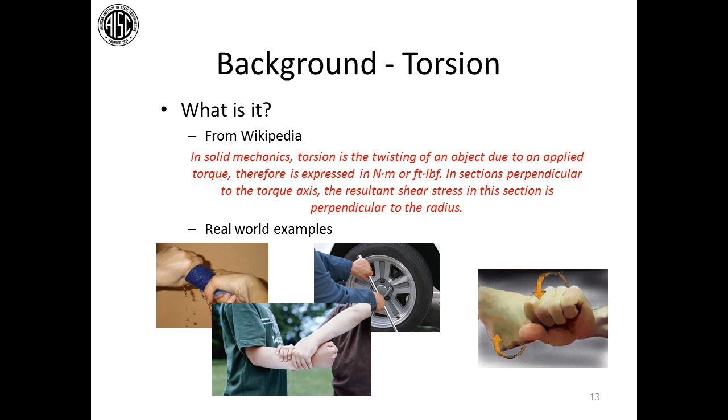And torque, again, is just a twisting moment. Now I want to do a little more background, and a lot of what I'll be trying to do with this webinar is - if torsion has mystified you - try to relate it to some of the fundamental beam bending relationships, the governing differential equations you probably came across in your undergraduate mechanics class, deformable bodies class, whatever you want to call it.

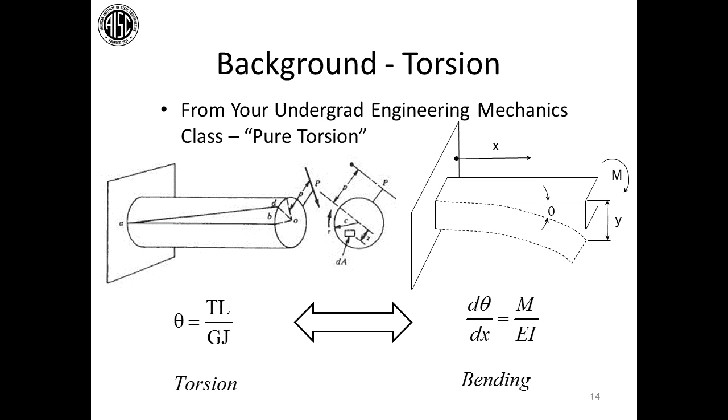So, but they are related, I think, and maybe that would help demystify where this torsion stuff comes from. So now I've spent a lot of time talking about that slide, and you're probably wondering, okay, so what?

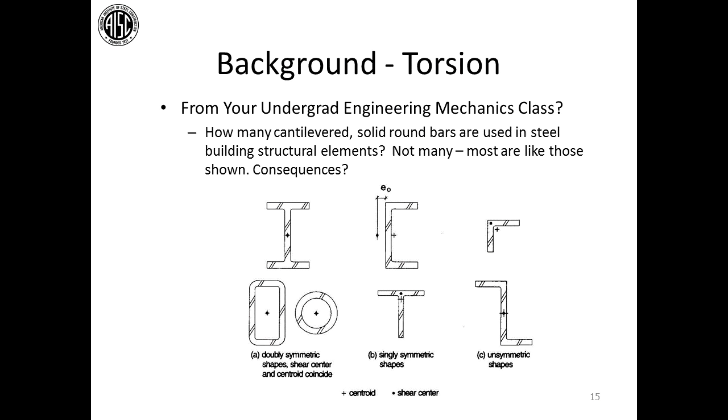So what are the consequences of these sections twisting? You have new things to worry about, new terms you need to know. I'm assuming many of you have already heard these terms, maybe years ago, but you need to know what shear flow means. You need to know what the shear center is and what that means. And the way you calculate what was called the torsion constant may change - you may call it something different, and you need to understand how that happens.

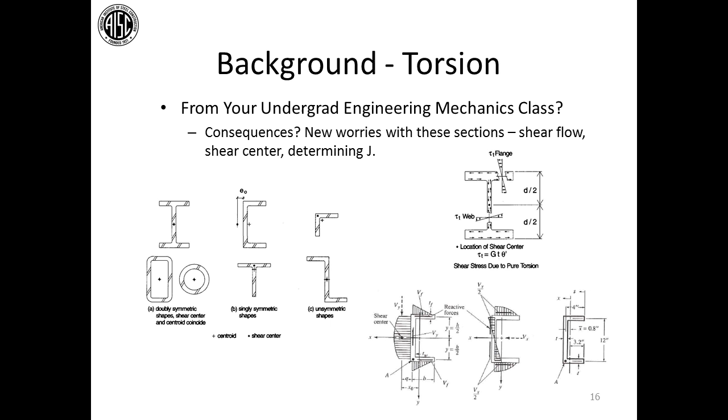The left-hand side of this slide on the bottom shows these cross-sections twisting. The right-hand side shows figures illustrating shear flow and distribution of stresses in different cross-sections. You need to understand what can happen when you load these sections in certain locations and how they respond to a load that either directly causes twist or is placed in a fashion that will give you some twist. We'll talk about those items in more detail in a minute.

The other thing you need to be cognizant of, if you have a thin-walled section with torsion that you can't ignore, is you may need to start worrying about warping. You need to understand what warping torsion is and what it can do to the cross-section.

If that tendency is prevented in some fashion - either due to support conditions, physical restraint from other elements in your structure, or prevented from the natural behavior of the cross-section - you may need to consider the effects of stresses that could result from this restraint on the behavior of the cross-section, the total stress state on the cross-section. So we need to have a discussion in relation to what warping is.

Again, in similar fashion to what I did before, talking about the fundamental governing differential equation for torsion, comparing that to the beam bending governing differential equation, moment curvature - I don't think I mentioned that when I went through it first. I'm going to try to relate what goes on with warping to beam bending. I do this when I teach it. I wasn't the one to come up with the analogy, but I think it's a great one, and it may help you understand what warping is, what it does, what stresses result, and how they can be calculated.

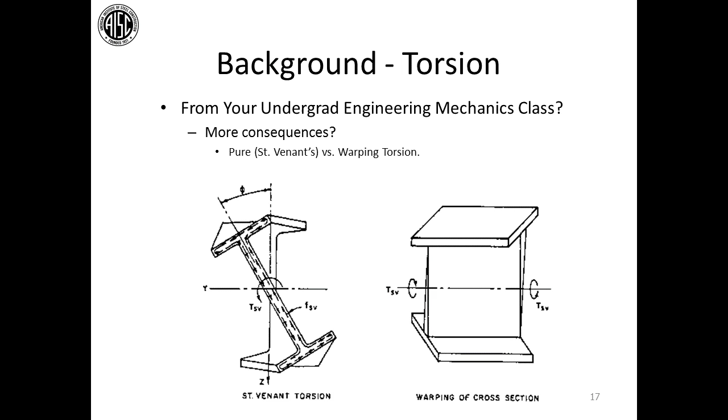The final thing in relation to the background portion of this webinar is: so what? I know you're probably here for the CEUs, PDHs. I certainly understand that. I hope you get something out of this webinar.

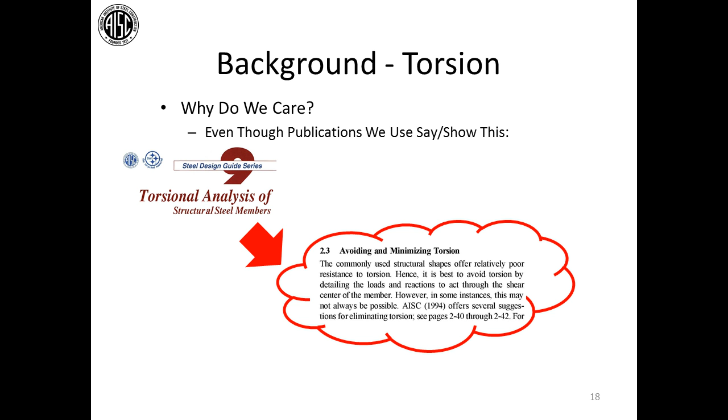So I'll talk about situations for buildings that a lot of you are probably familiar with, and then I'll talk about a couple situations for bridges where you can't ignore torsion, I don't think.

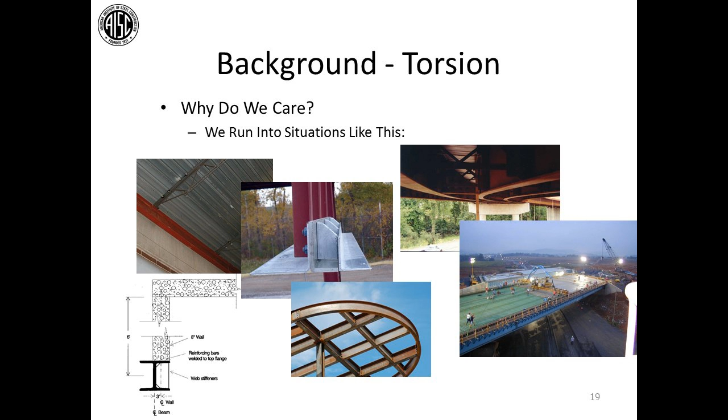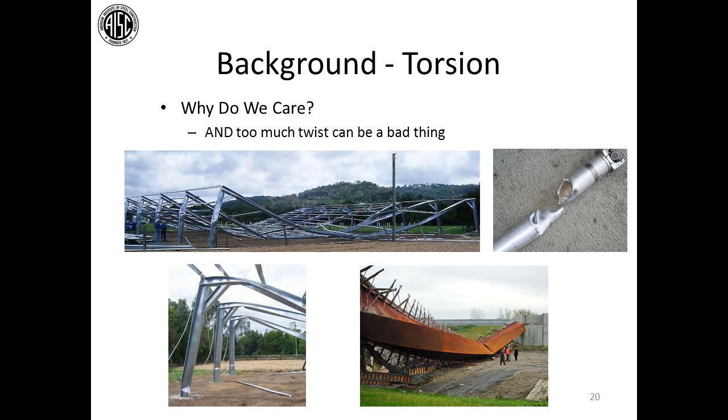That bridge came down in 2003, I think—I could be wrong about the date—but it suffered a global lateral torsional failure. That was more of a stability issue, but torsion was a component, and I just show a little shaft that's twisted all to pieces. You're not necessarily going to encounter that in structural steel buildings, but torsional failures can occur, so maybe that's why you're in here listening to me.

So now we move on to some fundamentals in relation to the behavior of thin-walled cross-sections, focusing on thin-walled open cross-sections. We'll talk a little bit more about what this shear flow stuff is, and a little bit about shear center, and then also the different types of torsion.

Elaborate a little bit more on St. Venant's pure torsion versus warping torsion and their effects. So let's get through those things, and then we'll talk about design criteria as they relate to AISC and considering what torsion does. And then we'll do an example.

So some terms you may or may not know—I've already alluded to these things, but let's talk about them again. I'm going to use a wiki definition because it's amusing, in relation to shear flow. I'll show you something from wiki in relation to shear center as well. And I think that's it.

So what's wiki say about shear flow? There's a solid mechanics and a fluid mechanics definition. In solid mechanics, it says it's a gradient of a shear stress force through the body. In fluid mechanics, it says it's the flow induced by such a force gradient in a fluid. When you combine these things, I think the sum of the two definitions is pretty good, in my opinion, in relation to what shear flow is.

I don't know what a shear stress force is, but go back to the fist example. Put your fists together and twist them relative to one another, and feel the shear stress that exists between the fists. The shear stress direction and effects change relative to the center of twist for the cross-section, and these shear stresses work their way around your fists and flow through the cross-section that your fist creates.

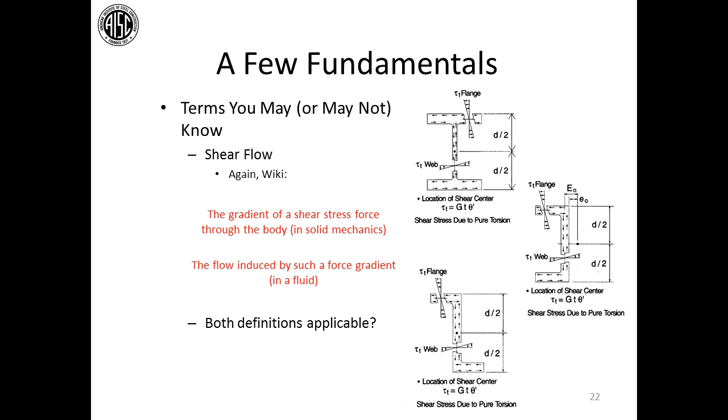Let's talk about shear center. If you buy that shear flows through a cross-section that's twisting - again, if you don't, put your fists together and twist them relative to one another, hopefully that helps you believe what I'm saying - then maybe you'll buy that you can establish a point within any cross-section, or even relative to a cross-section, about which all of that shear flow will cancel itself out. So if you load a cross-section through this point and look at how it responds, the resulting shear stresses will establish an equilibrium point and you won't get any net twist effects on the cross-section.

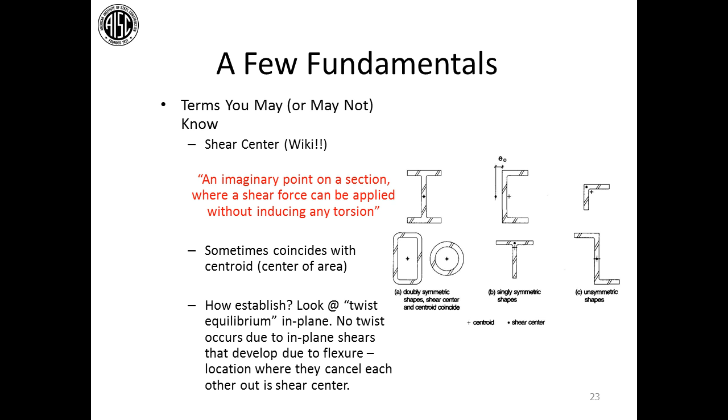And then where do you establish it? The shear center, you look at equilibrium - where do you get this balance of what's going on in the section when it responds relative to what's being applied to it? It's not always easy to figure out where it is for different cross-sections, but a lot of these values have already been established and are available to you in the manual, in Part 1, as many of you know. So let's move on to warping.

What warping is relative to pure St. Venant's torsion: thinking back to the round cantilevered solid bar and that equation we derived saying theta equals TL over GJ, that's pure torsion. The fist twist and the shear stresses are due to pure torsion. Pure St. Venant's torsion is planar rotation - everything stays plane, and you generate these in-plane shear stresses that flow. Again, you can locate a point called the shear center about which the force and the responding shear stresses cancel each other out.

What's warping? I alluded to it before. Here's the formal definition: it's a tendency of portions of your element to move out of plane when it twists. If it's not prevented physically, where it could be prevented physically, no stresses develop. But if it is prevented, either physically or naturally due to the behavior of the cross-section, you're going to develop additional shear and normal stresses that you may or may not want to consider in your design, which really boils down to an analysis problem following AISC.

So all thin-walled sections want to warp. For thin-walled open sections, the differences relate to how much, and you as a designer need to establish: do I need to worry about it? Can I explain away whether torsion is really happening in my section and whether it's significant?

And if you can't explain it away, how do you consider it? So you need to figure out if it should be

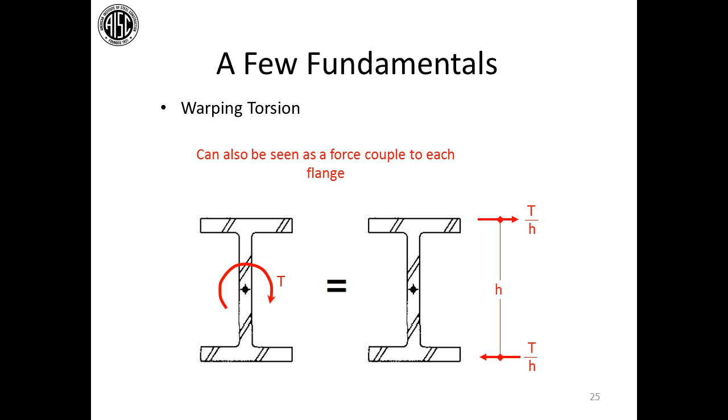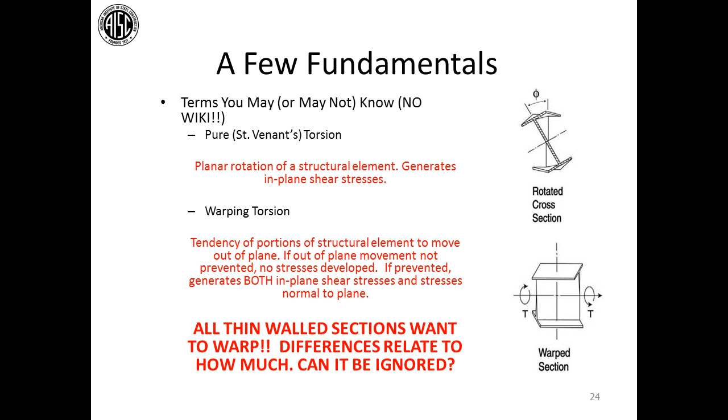And again, I'm going to try to do this and make it reasonably straight - I'm not holding my breath. So you get that rotation, and that rotation equates to what happens in the cross section.

So if you look in the upper right-hand corner of this slide, I'm not going to try to draw anything else because it'll be a mess. You see on the right-hand side of that small cross section, where it says warping, a cross section below it - the bottom flange is kicking in a direction, and the top flange is kicking in a direction. Bottom flange rotates one way because it's loaded as shown here. Top flange is rotating the other way because it's loaded in the opposite direction with these decoupled forces.

So hopefully trying to equate what's going on in the flanges to these rectangular sections that are bending may help you understand what warping is doing.

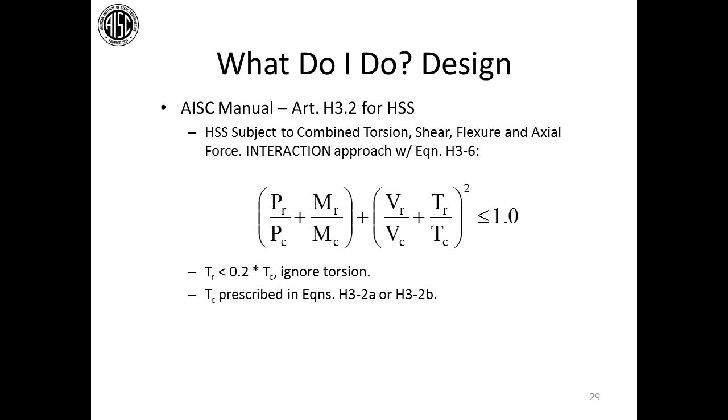So torsion is considered, but its effects are somewhat mitigated because it's understood that thin-walled closed cross-sections are pretty torsionally stiff. Just to mention what's at the bottom of the slide, AISC does recognize that if your required torsion demand is less than 20% of your capacity, you can ignore torsion completely in these cross-sections. There are some equations given in an earlier article that help you figure out some things in relation to torsion.

But again, my focus here is sections that aren't torsionally stiff, which are thin-walled open cross-sections - I's, channels, T's, things like that. Those items are addressed in Article H3.3. This is where I think it's okay for me to say this turns into an analysis problem. You're doing stress checks, determining cumulative stresses due to all effects at locations of interest to you as a designer, and comparing them to some limits. There are normal stress evaluations, shear stress evaluations, and a critical stress evaluation.

I'm going to focus on the first two shown here, the normal and shear stress components, and I'll tell you why. If you're designing with a section and you're concerned about its torsional buckling resistance, that's certainly something that needs to be a worry to you. But Chris Moen and I agreed when we put this together that if you run into a situation where you're worried about the buckling capacity of a section under an applied torque, you should probably attempt to detail the section so that isn't a concern.

Try to make the section as compact as possible for twist. There's been a lot of research on torsional behavior of steel sections, but I don't think there's much out there that's been codified for the rolled shapes you design—the I's, the T's, the angles—regarding their buckling limits. So we're arguing you should proportion these sections so you're not concerned about torsional buckling, pure twist buckling. Typically the torsionally weak sections are cruciform cross-sections, the weakest, and you don't design with those. So I'm focusing on the first two equations here.

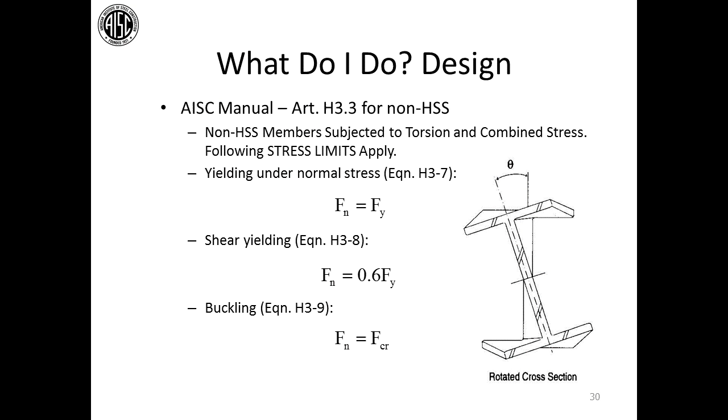It's in Article H3.3, where they talk about torsion and what you need to do. There are stress limits. Where do you get these stresses? How do you calculate what the demands are to compare to yield or 60% of yield for normal and shear? That's where Design Guide 9 comes in.

Design Guide 9, along with giving a lot of the background I've already talked about, elaborates more on how you calculate these demands—how you figure out what your stresses are that you're going to compare to yield or 60% of yield. It's basically superposition.

We're dealing with limiting things, keeping things elastic from a stress perspective, and you're combining stresses caused by all the possible effects in your steel shape, doing that in a critical fashion. You're trying to find the location in the cross-section where the additive effects of directly applied axial loads with strong and weak axis bending loads, with any directly applied shear loads, cause the worst effects.

If you notice, all the terms have pluses and minuses associated with them, so as a designer you need to track your signs—track the direction. What is axial causing relative to bending? Where is it in compression? Where is it in tension? This applies for normal stresses, and also for warping stresses. The same can be said for shear.

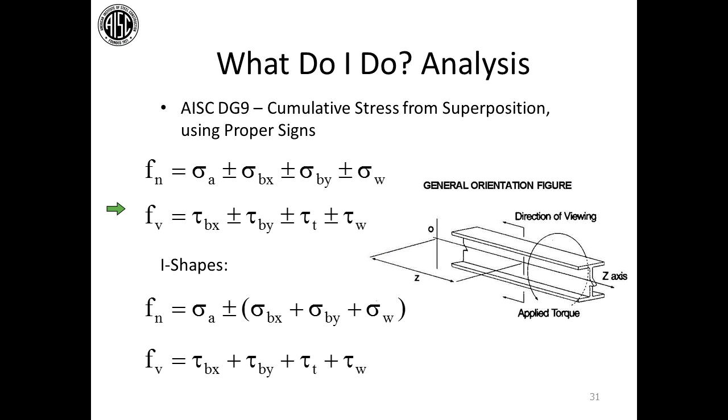Keep that in mind. Let me show the equation for the shear stress and normal stress contributors from warping. These equations look crazy, and I understand that, but there are, I think, relationships to beam bending. So I'm going to show you that sketch again that looks at the flanges of a beam and relates beam bending to torsion, which really are what lead to this equation looking the way that it is, and also what lead to the normal stress equation looking the way that it will look when I show it to you.

So I have to figure out angles of twist and then derive them three times. You won't have to do that when we get to the example when I show you some of the tools that are available to you. But you do need a value for theta triple prime. And where in the world does that come from?

So I'm going to go back to the slide where we did this relationship, and I'm going to compare it to the next slide. It all reverts back to the simplification of our I shape that twists, looking at the flange of a rectangular beam. That beam bends, and you generate shear stresses and normal stresses in the flanges of the cross section because, again, when we equate the flange of the beam to what it really is in the cross section - a top or bottom flange - you get this out-of-plane kick of each of the flanges. So you generate these stresses.

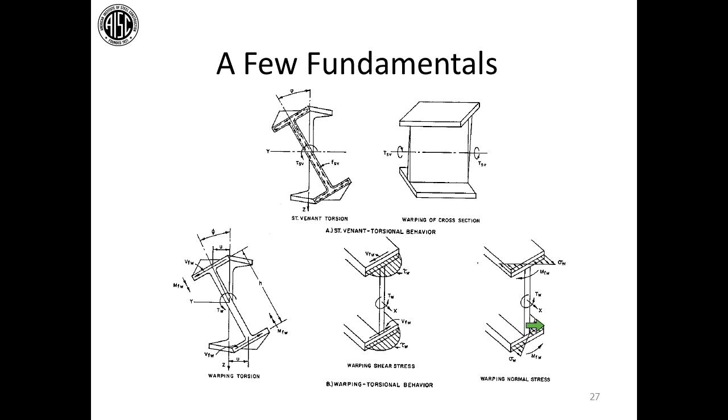So in a beam that's bending, shear stress equals VQ over IT - the shear in the cross section times the first moment of the area divided by the moment of inertia times the elemental thickness. And the normal stress is My or MC over I - the moment at that location times the distance away from the neutral axis divided by the moment of inertia, or M over S, the moment divided by the section modulus. We have those relationships. So in our flanges, to calculate those stresses, what's causing this moment in a section that twists? It's this load - it's torque.

And your governing differential equation, I'm not going to go all the way back to the slide where I show you theta equals TL over GJ, but the torque can be related to the angle of rotation. So you can take all of those relationships, the basic beam bending stuff shown in this slide, and relate it to the load that causes this beam, which is really a flange, to bend, which is a decoupled torque shown in this slide, and then relate that to the twist that the torque causes.

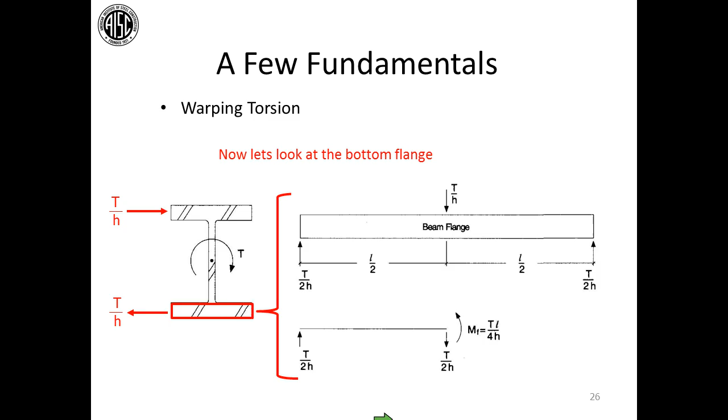You jumble all those equations together, and you end up with the equation for the warping shear stress. This comes from relating what's going on in the cross section when it twists to the flanges acting as independent little rectangular beams that are bending. So that's the shear stress equation.

For the normal stress equation due to warping, this again falls out of saying your flange acts like a beam that's bending. The load causing that beam to bend, in quotes, is a torque. That torque leads to twist, theta. Combine it: normal stress, My over I. What's our moment? It comes from the torque.

Jumble those things together, and you end up with this equation where you introduce another geometric parameter, the normalized warping function at the location where you're interested in calculating things. So the warping statical moment and the normalized warping function fall out of combining all these things together, and they're geometric parameters that can be calculated for each rolled shape.

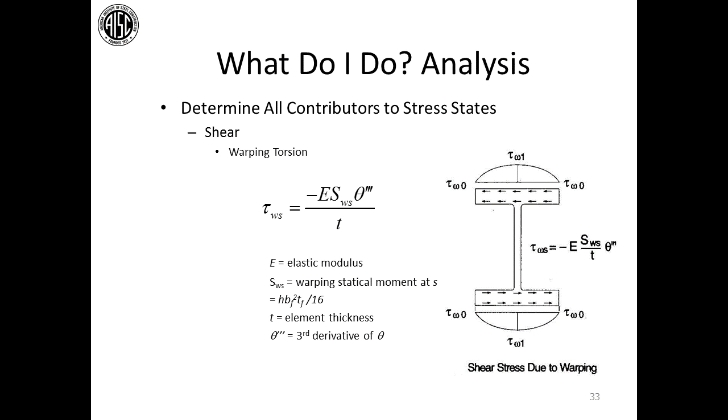In AISC, this particular formula involves the second derivative of theta. Remember that the last one involves the third derivative of theta. You see when we relate shear to bending how you have this derivative relationship for warping, and then the Saint-Venant's, or pure torsion, term involves the first derivative of theta.

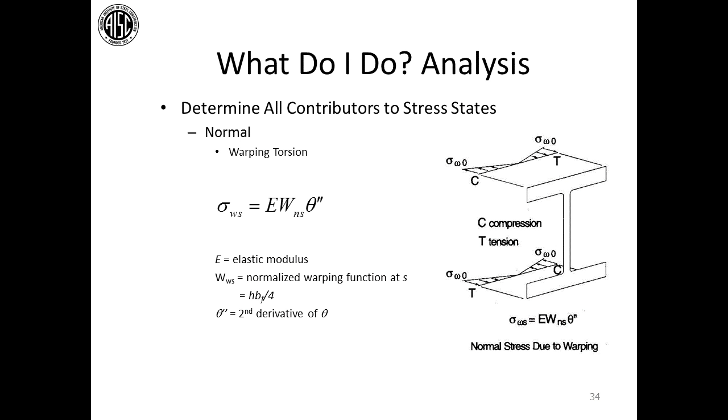So like I talked about a little bit ago, I'm assuming nobody here would want to calculate first, second, or third derivatives of theta. This is where Design Guide 9 comes in as an aid to help you figure out what these stresses are and calculate them when you need to. So I'm going to discuss what's available in Design Guide 9 and the appendices. There are two sets of appendices in DG9. I'll show you some examples.

I've got one more simple discussion point in relation to behavior of sections that warp: the most simplified way to look at an analogous thing that involves beams and bending. I'll show you a reference list, and then we can move on to the example.

So this is what's shown in Appendix A of Design Guide 9. So what do you do? I'm listing this as analysis because, again, your goal is to calculate stresses. So I consider that an analysis problem. You may disagree with the terminology, but that's what I consider it.

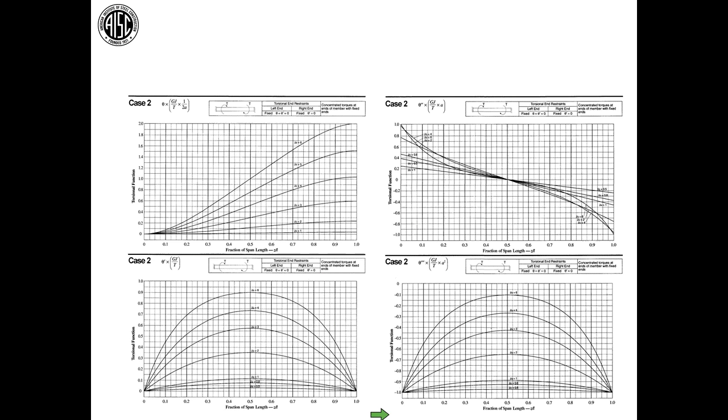There's a bunch of them shown in the back of Design Guide 9. So I'll blow up the first plot there for case 2. This sketch shows you what you're considering. There's a little verbal discussion over here talking about what the boundary conditions are, and you see this variation. Basically, the y-axis here is the answer to this equation.

So what you get out of this particular figure is a number that equals what's shown in this equation. When we do the example, I'll show you what that means. The x-axis is where you are along the span, so you can use these functions to figure out what you need in relation to theta here on this particular diagram, and then its first, second, and third derivatives.

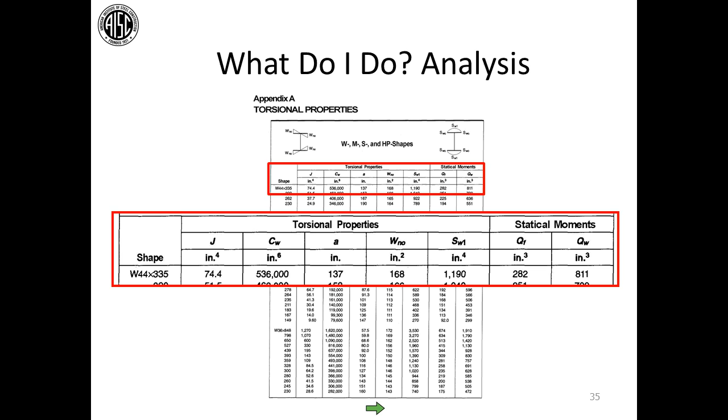These plots differ based upon the quantities L over A, where L is the span length shown in lowercase here, and A is this additional geometric parameter that is shown in Appendix A. So lowercase a is shown here.

It basically was derived to allow you to use these plots for all of the rolled shapes given in Appendix A. So it's basically a parameter that addresses the torsional stiffness of the cross-section geometrically. We'll talk about, when I get to the example and calculate one particular number, how to use this table for one value you would need to get stress in a little bit.

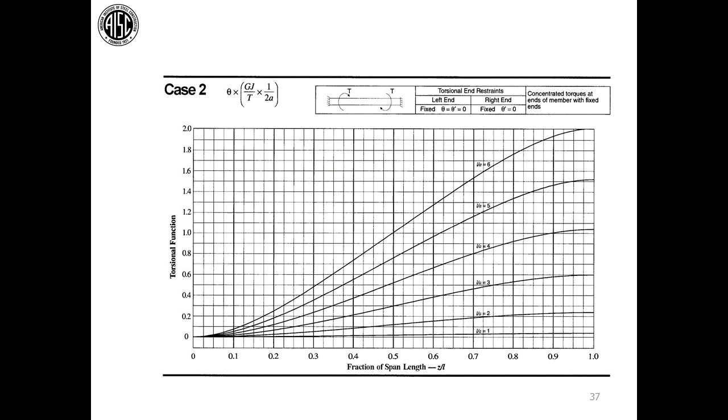So that's what's available in Design Guide 9. And again, we'll come back to that when we get to the second part of this webinar, which is doing an example where it could be argued you need to examine twist and its effects on the behavior, an analysis problem, the stresses in the cross-section.

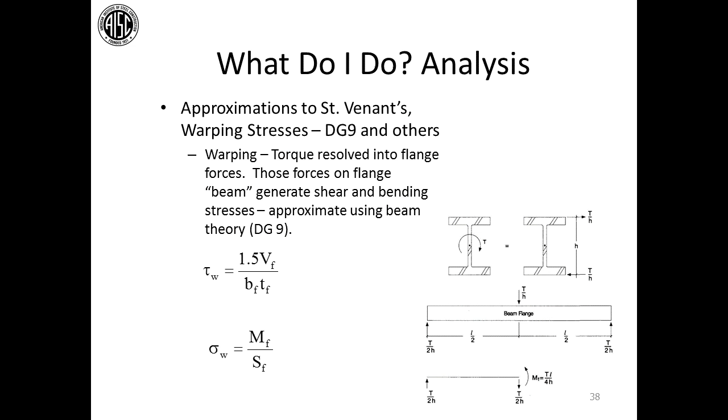So the last thing I'd like to point out before I get to the example is just some sources of information that you may or may not be aware of that could help you when you get to a point where you think you need to address torsion. The first two listed for buildings are obvious, I would think: DG9, which is what I've been talking about a little bit, and obviously your manual. That's where you find the codified information. In DG9, it gives you more background and additional aids that can help you do this.

I do want to point out a couple of sources from the bridge side of the street that may be beneficial to you. There's a document published by the National Steel Bridge Alliance in conjunction with AASHTO through one of their collaborative groups, one that I work with. It's called the Guidelines for Steel Girder Bridge Analysis. It was published by a gentleman that did most of the work, his name's Domenic Coletti. He works for HDR over in North Carolina. There's a lot of discussion in that document that may be beneficial in relation to understanding what torsion does that could supplement some of the things. You need to be aware that you can go get that from the web. It's available for free download through AISC, and it's a very beneficial document to have.

The figures that I showed, which I think are the best ones I could find that detail what warping does in relation to direct torsion and the corresponding stresses from both of those effects, come from the AISC NSBA Steel Bridge Design Handbook. The figures come from an older version of the handbook than I think was available online, but still that link will get you to additional discussion about what's going on in these cross sections. The version where the figures are in is one where they're housed, I think, in Chapter 12, if I remember correctly, and it deals with horizontally curved cross sections.

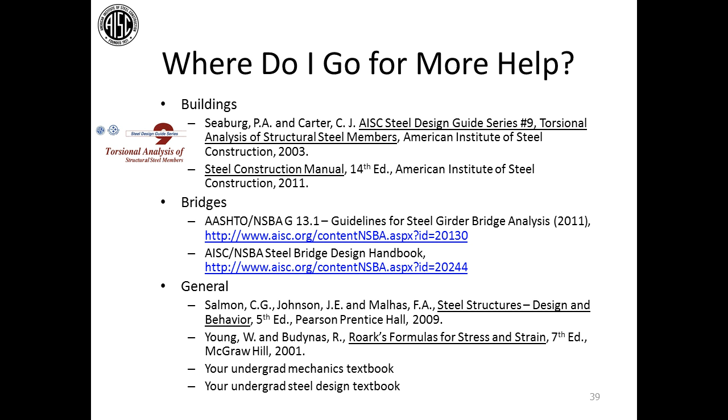So that's something to keep in mind as well. And then just general resources. I think the best source of information in relation to steel structural element behavior is Salmon Johnson and Malhas, that textbook. If you have cross sections where you've got twists that aren't standard shapes...

I want to push you to Roark's Formulas for Stress and Strain, and obviously your undergrad books are of interest to you. So I think we're going to keep rolling right into the example, and then at the end of the example, if there's time, I'll take some questions from people.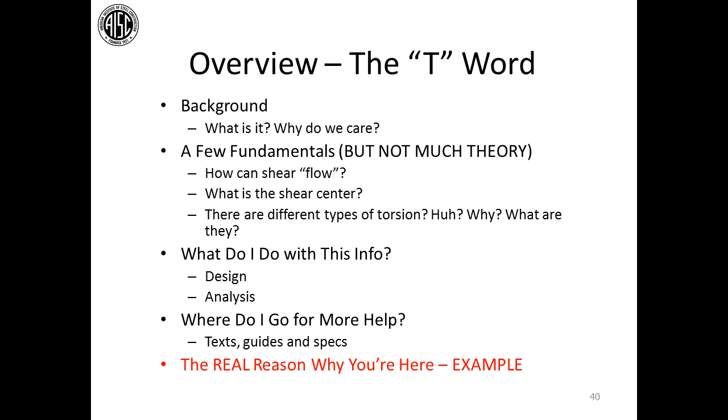So here's what, and again, this is why I'm assuming you're all here. Hopefully you're all still conscious and ready to look at what we're going to do here. So here's the example we're going to examine.

This is just a steel lintel beam spanning an opening in a bearing wall. It's supporting, as shown on the left-hand side, the section cut. It's supporting a CMU wall, but it also has a facade that's dumping load to that I shape. We're using an I shape here that causes twist. So you have a section cut, you've got the elevation view. This is a long span lintel, 15 feet.

There's live load applied to the roof of this thing. But when Chris and I put this presentation together for NASCC and our discussions, and Chris's discussions with Jake Lamb, who should get some props for this because he provided the example to Chris, we kind of decided, Jake agreed I think with Chris, that we could argue that the live loads applied to the roof would be arched over the lintel. You may disagree, you may think we're full of it, but for the sake of the example, we're just including dead load. And really, if you included the live loads, those would just be additional stresses, additional demand, that would lead to more demand on the cross-section.

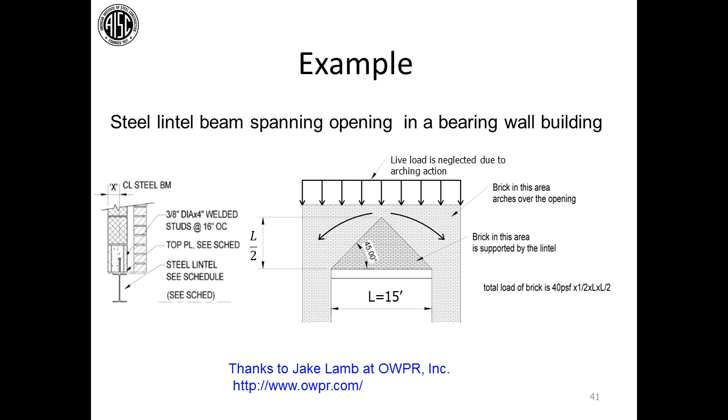The process is going to be the same. So this is what we're looking at. You see our triangular area of influence here. So we're looking at that triangle, and we're going to simplify the dead loads that are applied directly to the section, and those that cause twist, as uniform loads. So again, the process is largely the same.

So let's talk about what you do. You define your structural system, how long it is, boundary conditions, what the materials are. You find out what the demands are due to loads that cause direct shear, that cause vertical bending, that's what I'm calling the moment M. They cause torsion and any applied axial loads.

You have to calculate the angle of twist from the torsional effects and its derivatives, and then you use the equations from DG9 to calculate or superimpose and determine the cumulative bending, torsion, axial components to the normal stresses, and then the components to the shear stresses. And then you add them up.

So we're going to go through this process, and really probably the biggest component of this process—obviously you have to define your loads and make sure you know the span right—but one of the biggest components, especially in relation to twists, is adequately defining the boundary conditions. So I'll talk about those a little bit.

So let's discuss the boundary conditions now. I forgot I was going to do that. So first of all, we'll select a cross section. Typically you want to select a cross section that's about the same depth as the course of CMU that you're supporting. So we're going to use an 8-inch deep cross section, a W8, and we just selected a W8 by 24, 50 KSI, 15-foot span.

So these are some details that show the support conditions for this lintel. I think if you look at the elevation view, you could argue that it's simply supported. So we're going to assume pin-pin for vertical loads, pin-pin for shear, direct shear, and for vertical bending moment. But then you wonder what's going on with respect to twist and what are the support conditions with respect to twist.

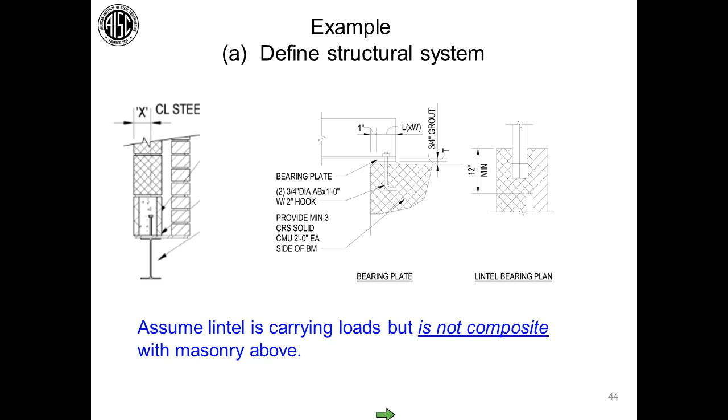So now back to the boundary condition discussion. We have our section shown here. You've got the facade causing a twist load, and you've got the CMU dead load causing a directly applied bending moment. We're going to simplify those loads as uniform loads. I'll calculate them in a minute. And let's talk about the boundary conditions.

I think you all would agree we can assume this thing is pin-pin for vertical bending due to the directly applied load from the CMU plus the vertical component of the load from the facade. If we assume it's simply supported for bending as opposed to fixed, that obviously affects the deformations, the rotations, and the corresponding stresses, where pin-pin gives no bending stresses at the support, but fixed generates bending stresses at the support.

So let's compare that to torsion. We have torsion, and we're showing pin-pin for torsion. We will come up with loads that will be a uniformly applied torque TU along the length of the member, versus fixed for torsion. So we need to talk about what twist pinned and twist fixed means.

For this particular lintel, since it's supported along the full width of the bottom flange on the CMU upon which it rests, there's no twist there. So even when we define something as torsionally pinned at the ends, that means there's no twist occurring. These boundary conditions really relate to what goes on with respect to warping. So when we say twist pinned or twist fixed, at the supports there's no twist happening. But what does twist pinned or twist fixed mean with respect to warping?

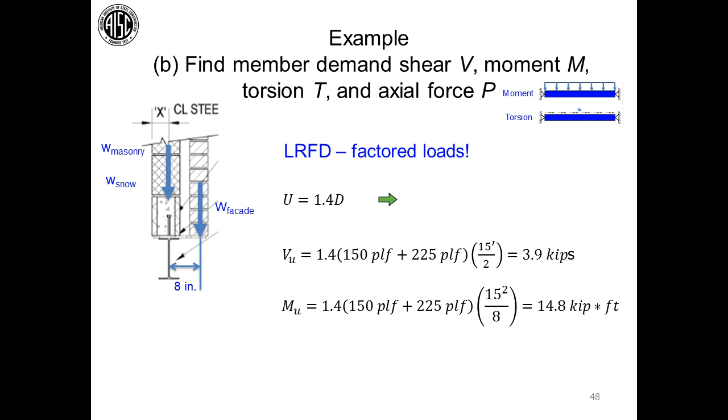So these are the directly applied loads, the cumulative effect of these two leading to shear and bending. Let's talk about torsion. We're saying, somewhat arbitrarily, that this facade load is applied at an eccentricity of 8 inches relative to the center line of the web. So that load not only leads to vertical bending, moment and shear, but it also leads to twist.

So we take our facade uniform load, again approximating as a uniform load, and multiply it by the eccentricity, so you get this uniformly applied torque. The torque is the distance away per foot, so that's little tu - that's why we're showing it as little tu.

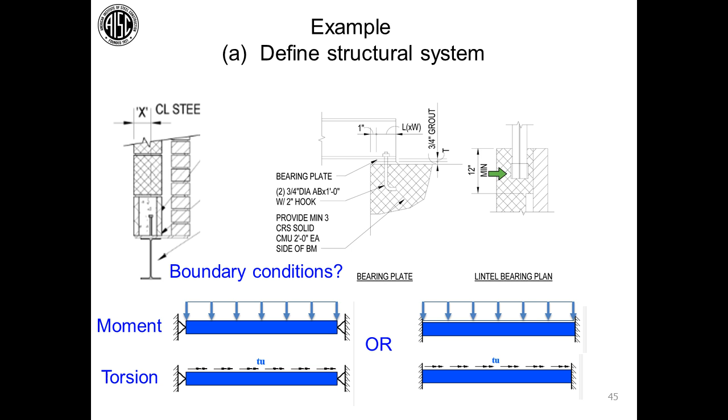I just received a question about detailing for twist-fixed boundary conditions, so let me go back and look at this sketch. This is a plan view of the lintel, and you notice it butts up against block, it appears. It really depends how you define whether you have restraint or not restraint of warping - based upon whether you think the section for this particular case is bearing up against something. That's physical restraint of warping in my opinion. So I think you need to look at your detailing - can you justify to yourself that my section is butting up against something stiff enough to prevent out-of-plane movement at the supports? But that doesn't necessarily mean you can ignore warping stresses altogether in this lintel, and I'll get to that in a minute.

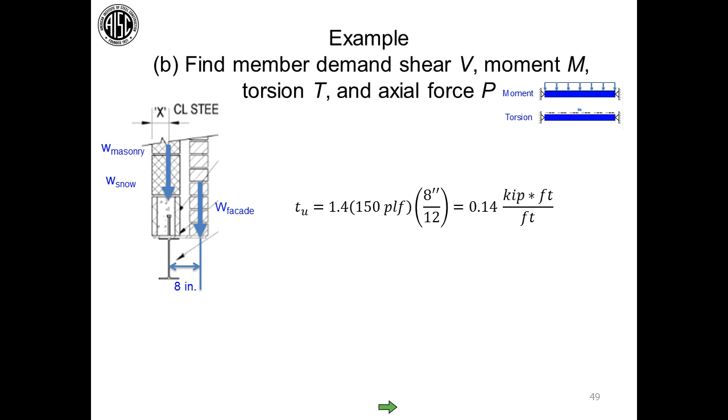Back to our calculations - we calculated VU, MU, and TU. TU is simplified as a uniform load across the length of the section, shown up here. Now we've got to figure out these stresses - due to the moment, due to the shear, and what the twist does. So how do we calculate the angle of twist and its derivatives to give us the shear stresses and the normal stresses I talked about a little bit ago?

Well, you can use Design Guide 9, or you can use another tool, the software package known as WinTORQ. WinTORQ's been out for a while - it was produced back when DG9 was created, so I'm assuming this is back in the 80s, back when Windows was brand new. And it hasn't been updated to the best of my knowledge - it's still version 1, in fact the version I have I think says version 1.

So you can get it from steeltools.org, or from other locations - it's available for free download. I'll tell you that if you're running Windows 8, when I installed it you get these DLL errors that show up - abort, retry, ignore. I would go ahead and retry it; if it doesn't work, then ignore it, and it will still install. To find the program, go into Program Files and look for the WinTORQ folder - it could be in the Program Files folder or in the Program Files x86 folder.

In the WinTORQ folder is an executable. Create a shortcut and it'll work. That's what I'm running here, and I'll show you how to use it when we get to calculating stresses. WinTORQ is available for you as a free download. It goes through calculating the angles of twist and their derivatives, along with stresses.

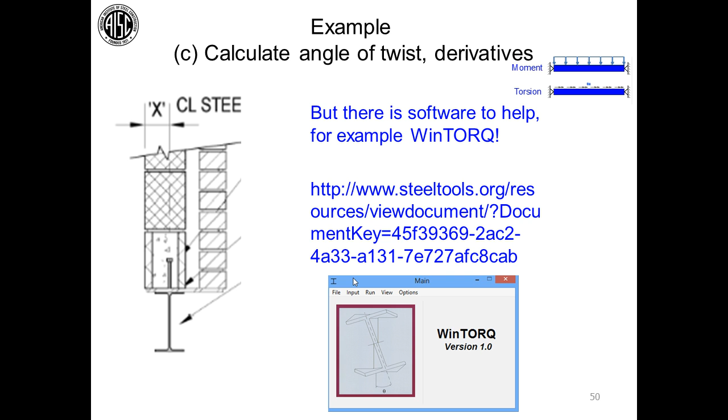Let's talk about how we calculate stresses. Again, we have direct bending, MU and VU, so we need to figure out from the moment how that contributes to cumulative normal stresses, and then we have twist. Let's talk about the normal stresses first—the demands from bending—and then we'll talk about twist. I'll show you how to use Design Guide 9 along with this tool.

So for bending normal stresses, we have bending about the local x-axis of the cross-section. It's MC over I, and you end up with 8.5 KSI. I'm not going to belabor that—that's one contributor to this formula. We don't have any directly applied axial stresses, only bending about the local x-axis, no weak axis bending, and we need to figure out what warping does. So there's the strong axis bending contributor.

Let's look at warping. So again, we're only concerned about sigma bx and sigma w here. This was the formula I gave you a while ago that discusses how you calculate warping normal stresses. Notice, to reiterate, we need the modulus, additional geometric properties, the normalized warping function for the cross-section, and the second derivative of theta.

As I stated before, in Appendix B, this is case 4—again, a twist pin case. Torsion is restrained at the ends, warping is unrestrained. That's what we've decided in relation to this lintel, and it's a uniformly loaded case 4. There's the plot for the second derivative of theta for that case.

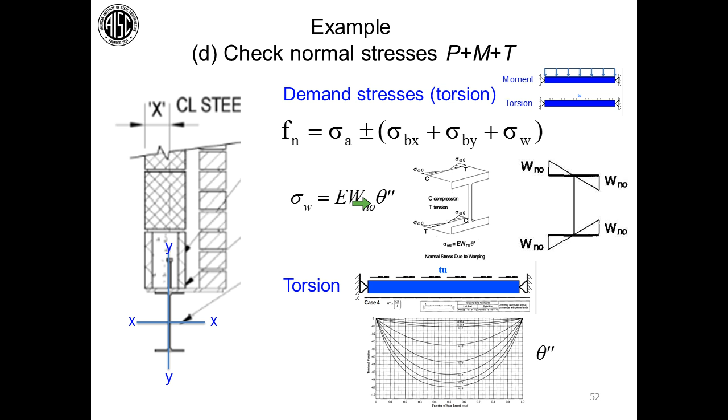So if you wanted to use DG9 instead of the software, how would you use this plot? It's shown on this slide. I'm going to work through it, with the calculations shown below. Again, we have case 4—there's the sketch, pin for torsion, uniformly applied torque, lowercase t. The answer you get out of this plot, following these arrows, I'll discuss in a minute.

That answer is what this formula shown up here equals—the number equals that. To solve for theta double prime, you must then divide your answer by this value, which is G, the shear modulus, times J, here the polar moment of inertia, divided by the load. This is not the thickness—this is the load that corresponds to the sketch.

So what do you do? Given how this section is supported—simply supported for twist—you look at the variation in theta shown here. The x-axis is where you are along the span, non-dimensionalized, the fraction of the span length. Notice that theta double prime does not go to zero at mid-span. It has a value, representative of a natural restraint of warping that occurs in various cross-sections when they bend.

What happens is really due to compatibility or continuity. Out at mid-span, you've got this section twisting. For the twist to be continuous, there's got to be some point at which twists in opposite directions become compatible. That's a natural restraint of warping, and it leads to a non-zero theta double prime. So at mid-span, where we have our maximum vertical bending stresses—sigma bx is maximum at mid-span—we have non-zero theta double prime.

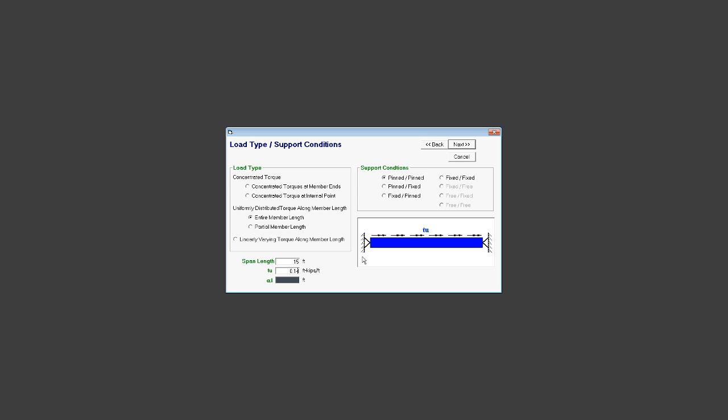But you give it the information that will show up in the header for the output files. You click Next, and you choose the corresponding load type - so we have uniformly distributed torque, that's what we simplified it as along the entire member length. You choose the appropriate support conditions - I'll show you pinned-pinned, but we chose it to be pin for twist. You choose the span length, 15. You choose your load - notice the units, 0.14, foot-kips per foot, or kip-feet per feet. I can't say that. You click Next.

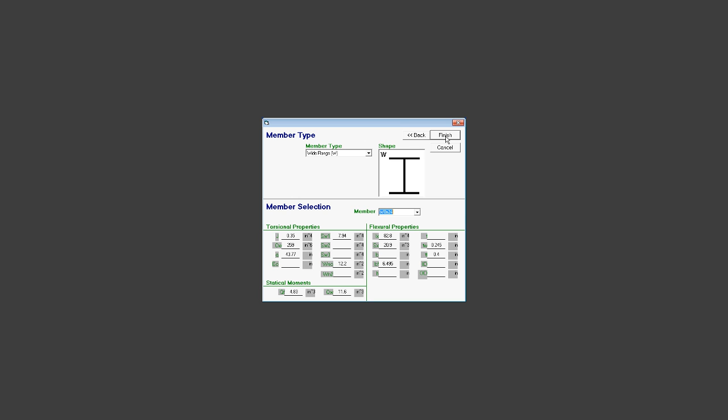And then you have a menu of cross-sections. You can choose various rolled shapes. We have a wide flange, and I'll choose W8x24 here. Let me find it - there we go. And you see the section properties show up. Now I will mention that this is an older version - the software is based on older information from Part 1 of the manual, so some of the section properties may change a little bit, but it does give you values that are certainly very close to what they are now. So you click Finish.

And then you go ahead and run the program. So you click Run - it says it works. And then to look at the output, you click View, and you click on Output. It can give you what you input - if you have a problem, you're concerned about things, you click on Output.

And you have options - you can create an Excel file or a text file. Since this program was developed so long ago, I am of the opinion, and so is Chris, that you create a text file. So you hit Create Text, and you will then see your output, and it'll create 2 files. I'm not going to do that because I already created the files. So let me go ahead here and show you what the resulting output files are. I'm going to click Cancel here. So that's how you run the program.

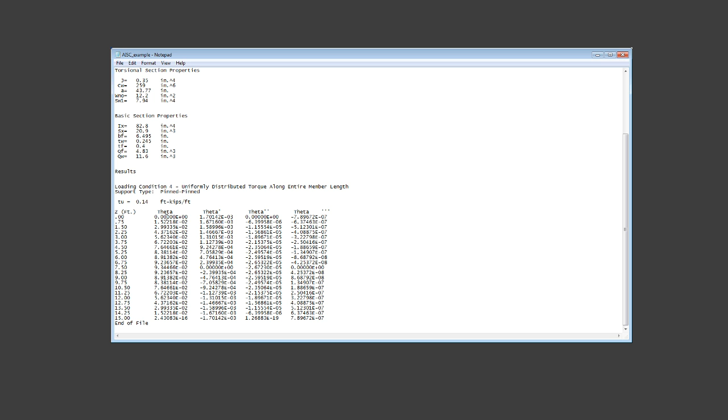2 output files are created. I hope you can see the first output file - Brent, let me know if you can see it, and I believe that you can. So you have 2 text files that are created. The first one, which is the input file name, shows you at the bottom all of the resulting angles of twist for that loading and boundary condition case that you examine, plus their first, second, and third derivatives. So it gives you all the thetas, theta primes, theta double primes, and theta triple primes.

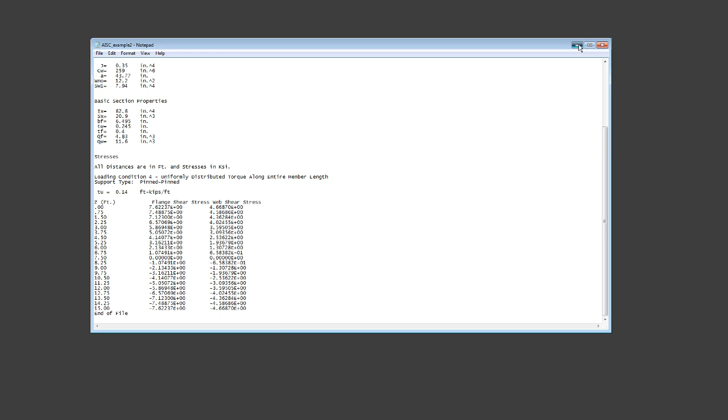The second file that's created, which is the input file name with the number 2 on the end, gives you stresses - flange shear stresses, web shear stresses for your cross section. And so we're going to work with theta prime, theta double prime, and theta triple prime, those values from WinTORQ. But you can see where the information comes from.

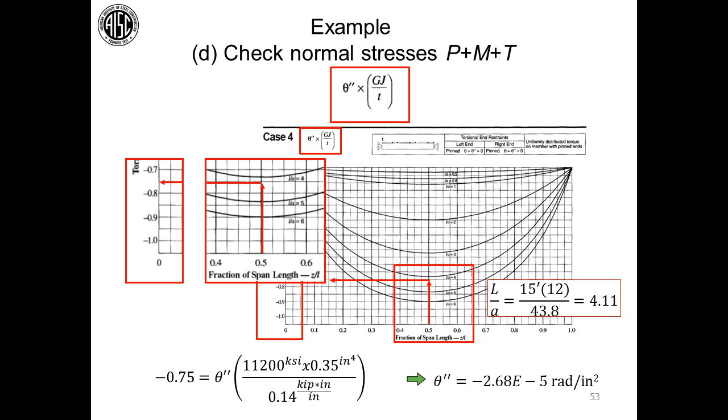I will say that for the stresses that you get, there are some instances where the warping components are ignored. So that's why I'm going to work with the values of theta prime, theta double prime, theta triple prime. So again, going back to the presentation, we got theta double prime from Appendix B in DG9. If you compare it to the output for this case from WinTORQ, you end up with the same number.

How do you use that to get the stresses? You're plugging it into the equation for the warping normal stresses—this is a formula I showed before. Theta double prime comes from either DG9 or WinTORQ. Plug in your modulus, your normalized warping function, and theta double prime, and you get 9.5 KSI.

Since we're working with a W-shape twisting, an I-shaped twisting, the equation allows you to superimpose the warping and bending effects. If you don't have that type of cross-section, you need to chase signs. So we add them together: our vertical bending component and our warping component. Notice how large the warping component is for this torsionally weak cross-section. We end up with 18 KSI for our cumulative stress effects.

Now that we have that, we compare it to the limits from Chapter H of the spec—looking at yielding under normal stresses. Could you consider buckling? My argument, and Chris agrees, is to try to proportion your section away from having a twist buckling problem, so we're focused just on the normal stresses. For 50 KSI steel, you reduce it and compare it to your cumulative stress effects—normal stress, vertical bending, and warping—you get 18 KSI, and the section's okay.

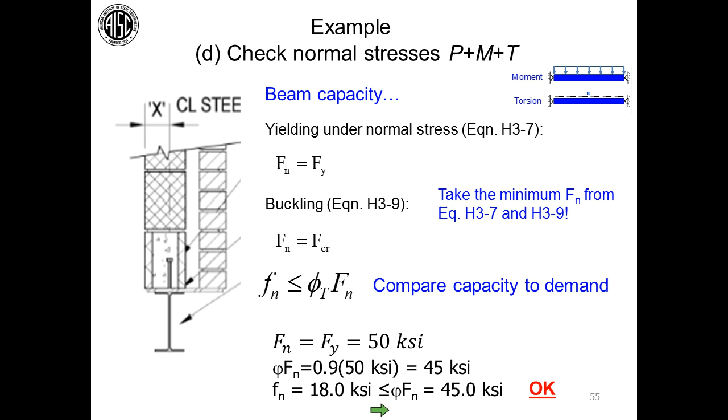Let's talk about shear stresses quickly. We've done the superposition of the normal stresses due to direct bending and due to warping, focusing on what was going on at the extreme fibers in the cross-section, the flanges. If you remember the warping sketches I showed you, all that behavior happens in the flanges.

What about shear? DG9 shows you superposition of shear stress effects: direct shear relative to the local X and local Y axes, St. Venant's or pure torsion shear stresses, and warping shear stresses. So what do we need to worry about with this section? We have to worry about direct shear from the vertical loads, VQ over IT—that's a standard calculation.

VU we calculate is 3.9. I'm not going to belabor this, but it ends up a little over 2 KSI, and we're focused on the web here. In I-sections, most of our shear resistance is in the web. We're going to calculate torsional shear stresses in the web, add those to our direct shear stresses in the web, and then compare those to other elements in the cross-section to get a critical total shear stress.

With I-shaped shear, you focus typically on the web element—that's your main shear resistance due to direct vertical loads. We have to figure out the cumulative shear stress in that rectangle and compare it to the cumulative shear stress in the flange rectangles, whichever is highest. That total shear stress is compared to our limits, 60% of yield. So we have vertical loads leading to direct shear, 2.23 KSI.

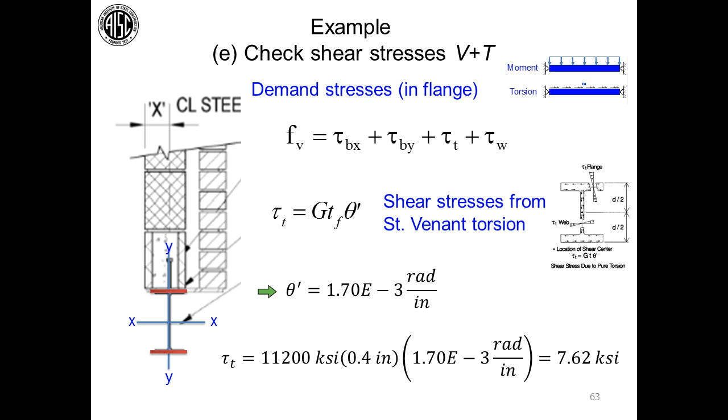Same plot we used for the torsional shear stresses in the web - all that's changing is the thickness. We plug the values in and calculate tau sub t in the flange. Again, this is theta prime from DG9 Appendix B for case 4, or from WinTorque. Plug everything in, you get 7.62 KSI.

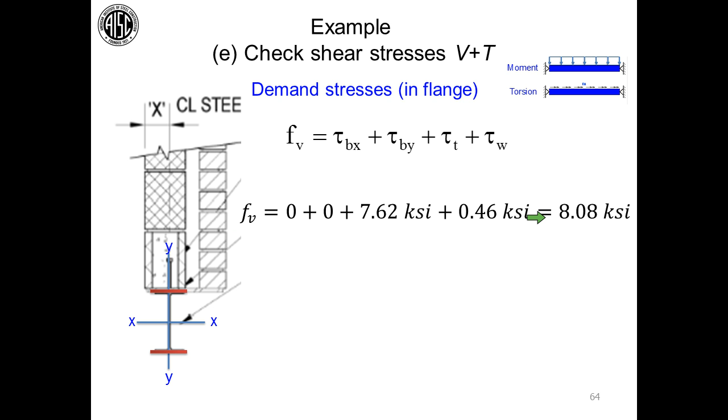So you're comparing - this is the cumulative stress in the flanges, torsion, pure torsion, warping - it's about 8 KSI. If you look back to the web where we calculated shear stresses from direct shear, adding the pure torsional shear stresses, it was about 6.9. So we have 6.9 versus 8. We take the maximum of those two - we're going to use 8 KSI here.

We compare it to our shear stress yielding limit, 60% of yield, and that's 27 KSI. We end up with it being acceptable. 8 KSI is what we calculated, 27 KSI is our limit.

So this section is acceptable, both for normal stresses generated due to warping, natural restraint of warping at midspan, and then shear stresses in the flanges and the web from torsion, as well as torsion and direct shear in the web, and torsion and warping in the flanges.

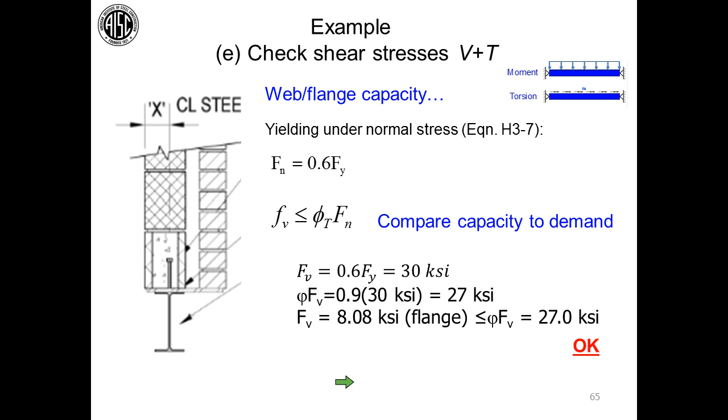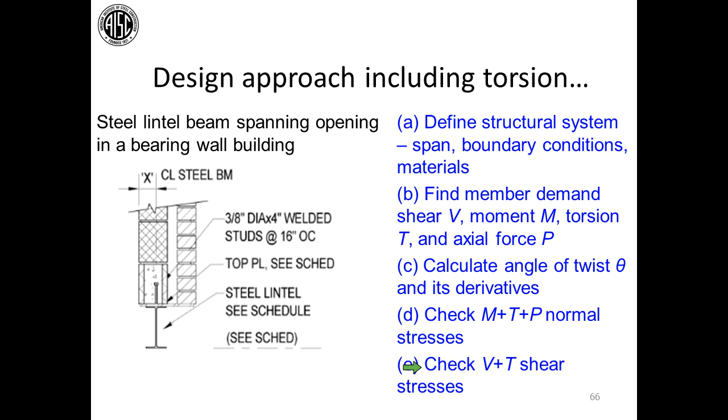So this kind of ends the process. Again, we went through these steps and calculated our demands after we defined the span and the support conditions, obviously the materials and the loads. We calculated the demands and their effects on the normal stresses and the shear stresses. And that ends the second half of the presentation.

So what I'd like to do is show you a bunch of references here. A lot of the stuff we took came from web pages - just for completeness, I'm showing where all of those are. The references shown at the top here are very similar to the ones I talked about before for the second half.

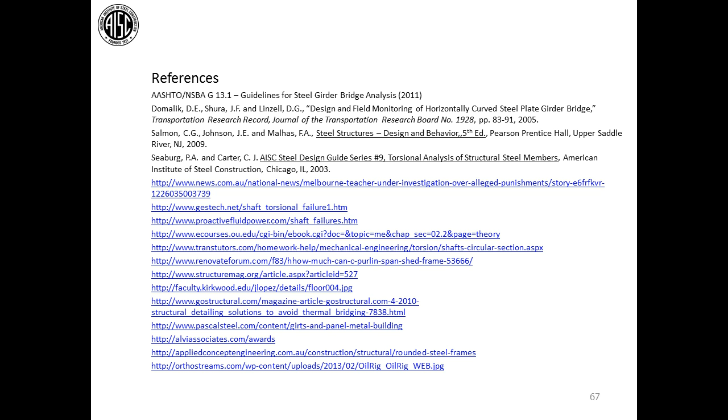A couple questions for you, Dan. I want to go to slide 46. The question is this: why did you choose pin and WinTorque, but on slide 46 you show it to be fixed free? Can I choose 46? It should be up on your screen. Okay, we're there.

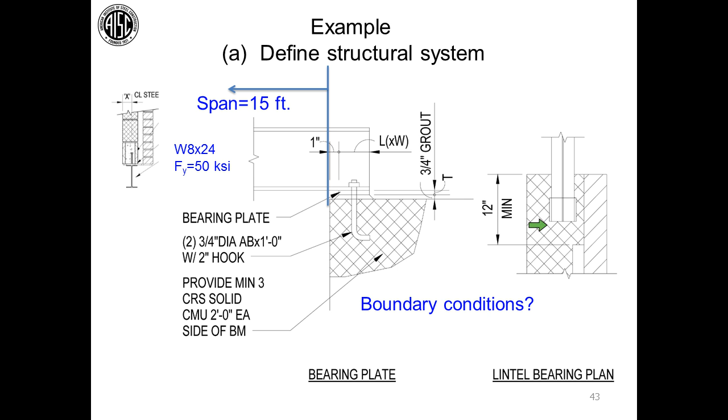Since we didn't have any more information, we thought it would be more appropriate to say, even though the sketch appears to show this butting up, we're not sure we can guarantee it, so we use a boundary condition case where twist is prevented because it's resting on block, but warping is not. So I hope that answers the question.

Okay, I'm going to take us to slide 54.

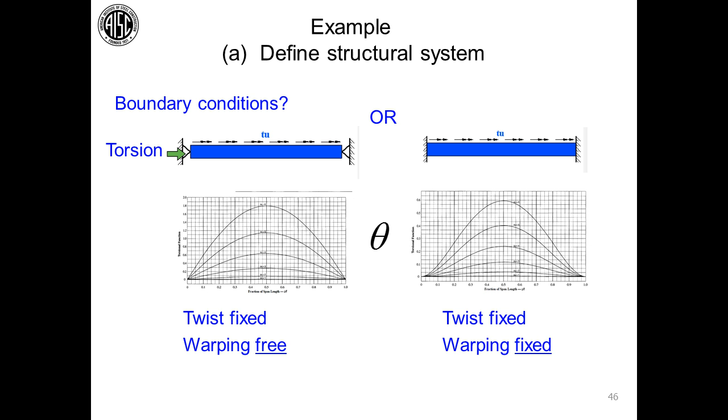The question is, in calculating F sub n, why is it that the St. Venant stresses are ignored? Usually this is accounted for in section F2 of AISC when calculating the critical moment. So the question is about St. Venant stress effects on normal stresses, I think.

St. Venant's, which is pure torsion as it's commonly defined, implies that when you twist a cross section, you have a planar response. Plane sections remain plane, but you generate in-plane shear stresses. So pure torsion traditionally is assumed to generate shear stresses only, and so no normal stresses would be generated.

So really, when you have warping... if you have pure torsion, the normal stresses are accounted for when sections warp via the simplification I talked about, where you equate elements of the cross section to a beam, and that's where the normal stresses show up. They are caused by twist, but they are reflected in the warping response of the cross section. So sigma W is what picks up what normal stresses are generated when cross sections twist.